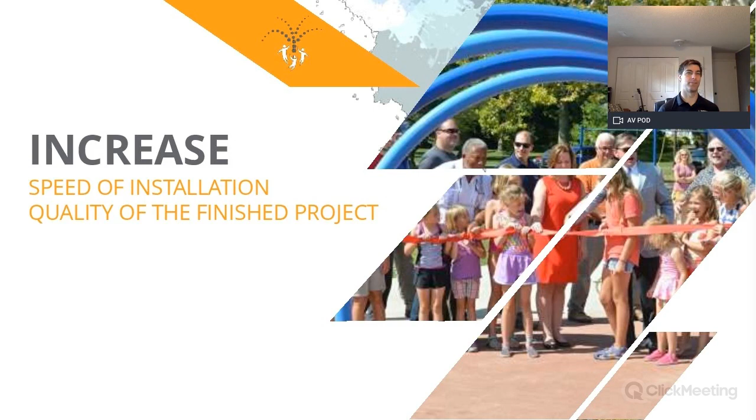So the very first thing that you're going to be doing is, after we talked a lot about planning in yesterday's webinar, when you actually go to install it, you definitely need to check your call before you dig. Depending where you are, you're going to have a different phone number, different states have different contacts. Please check with your local jurisdiction. The last thing you want to do is start your project off by hitting a gas line or who knows what. It could be anything. So that's very important. First step.

Next up, you're going to want to have some sort of a site survey, geotech report. You really want to be sure of what you're building on top of. If you build on, it could be marsh, it could be swamp, sand. It's going to cause you some problems as you go to pour footings. It's going to cause problems for the park over the years as you see shifting and settling. So the very first thing, start with a firm foundation, site survey, geotech.

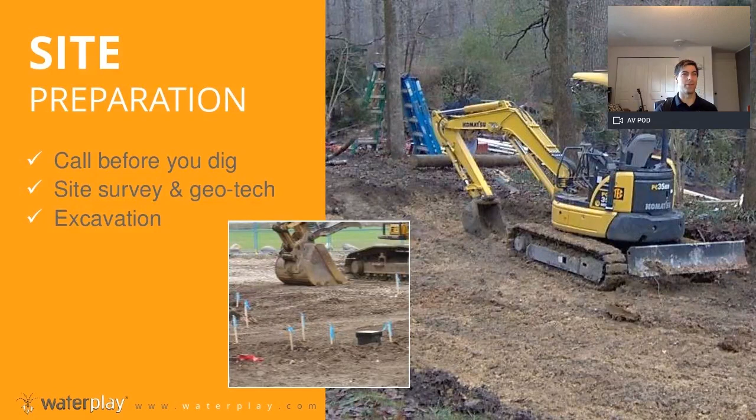And then you're ready to do some excavation. So level things out. You're going to want to clear the area. Here you can see that it looks like they're removing a forest for this project, so that's pretty intense. Hopefully yours is not to that level, but if you start with a flat area, it will go a long ways for you.

Most features, actually every feature, is going to require some type of footing just to stabilize the component. So typically this is your first step when you're on site: after you have an excavated clear area, you're going to prepare your footings. It could be as simple as digging down with an auger. You might have a site where you have precast footings. You might have square footings, round footings. Whatever size and shape of footings you have, this is going to be where you start.

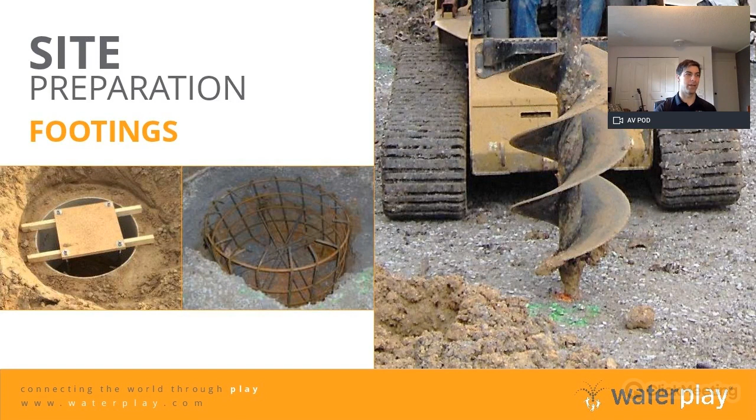Now your footings are going to be specified by your project engineer, and they need to review the weights of the components, they need to review the building codes, look at things like what you design for wind speed and items like that. So work with them closely to size the footings, but essentially this is where you're going to start. You can see here these guys are using an auger and simply coring out an area and filling it in with rebar reinforcement.

When product starts to arrive from your manufacturer, we try and make note of this because it's a pretty big step and quite often it gets overlooked. So you really want to inspect your shipment carefully. Know what you're supposed to be receiving. As a manufacturer, I can speak to this. We are at the mercy of truck drivers and courier companies, and typically they're really good. You get the odd shipment here or there. There's one or two a year where unfortunately there is some damage that's present.

It could just be maybe they cross-docked it, maybe there was an errant forklift driver, maybe something happened along the way, especially for those of you that are phoning in from Brazil and Spain. You know that you're quite a large distance from your manufacturers, and you really need to be careful, especially on an ocean container. It could have gone through a storm and things could have rocked pretty heavily in that container.

But the very first thing that you should do is request photos from your manufacturer and compare the photos with what you receive. Have them handy, have them on your phone. I mean, you could even print them out and just reference them compared to what you see when you unload the truck. And if something looks different, then start to dig. Start to go in there, see what moved, why it moved, what happened, and make sure there's no damage. If there is damage, note it on your bill of lading.

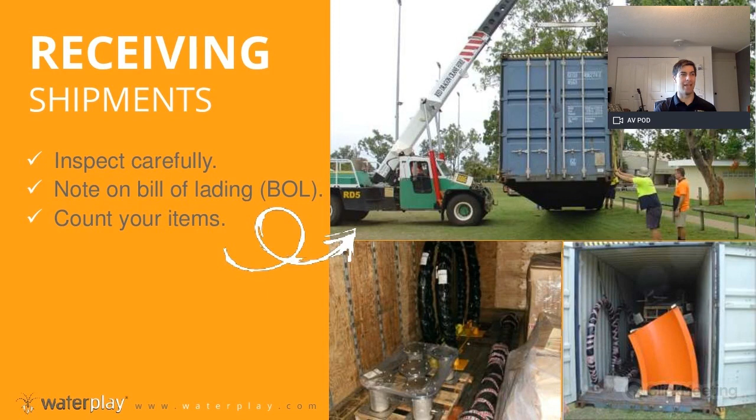Count your items, make sure everything is there, and if there's a problem, reach out to your manufacturer right away. They should be able to help you resolve it with the freight company. If you don't act quickly, there's very little recourse. It just gets messier. So act quickly, and it helps smooth out any potential problems.

Make sure that you're not getting moisture trapped in there too, and boiling it in a hot sun or anything like that. If you do end up getting a lot of moisture inside of the wrapping, at that point it's appropriate to unwrap it and let it dry out, but make sure that it's dry and secure, and leave protective wrapping on as much as possible, even just to keep it cleaner during the install.

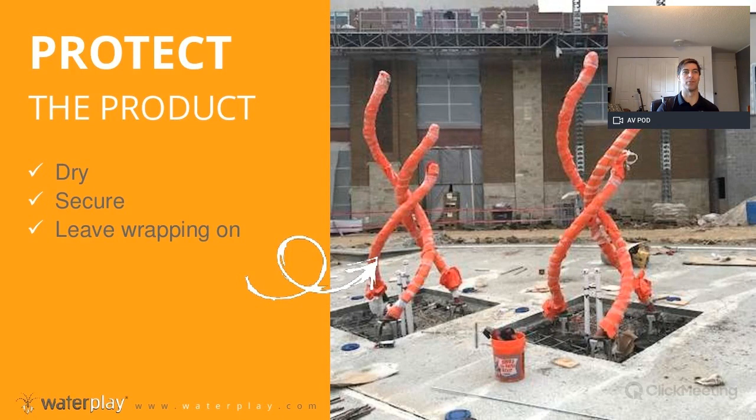Construction sites are dirty places, and when you hand this over to your customer, you really want it to be clean. You want it to pop. You want it to be looking amazing, and they'll be so thrilled with it. During the pre-shipment phase, this is where you're dealing with everything that is below concrete. So like I said before, the meat and potatoes, the fun part.

The other method that we see quite often, and this is perfectly acceptable, is something like a Hilti anchor, where you chemically anchor the bolts in place. And that's not a problem at all. It's pretty common, very strong. They use a very strong epoxy. As long as your project engineer is happy with that, no problem there at all. Typically, you'll have manufacturers send out anchor bolts to precast in place.

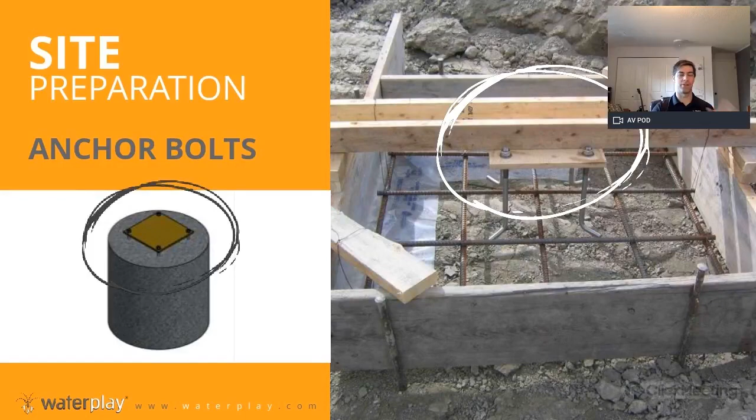Now, a lot of manufacturers use what we call an attach and exchange base. This is a really, really strong idea. It's pretty common in the industry now. Most people have it. It allows you to remove features and put on new features in the future. We talked yesterday about how you can use these for a phased installation. You can plan for the future. You can plan for maintenance. It's a really smart idea.

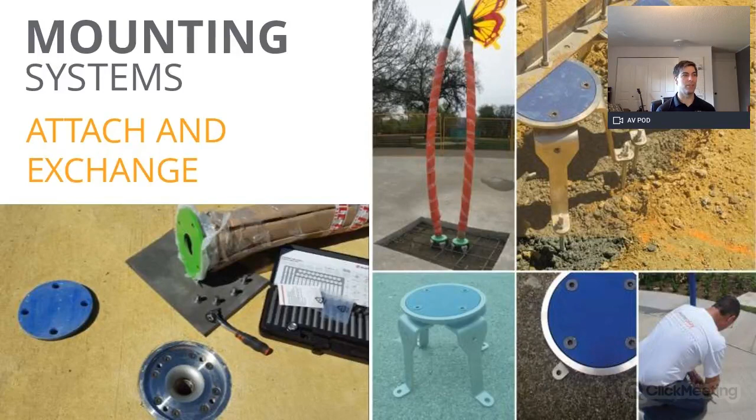Some of the other advantages we just listed out here, just so you can review this: you have a clean design. It could be flush, no toe guards or anything else like that. You can have a quick install. Most of the features typically would just bolt into place. Most of the work actually is done below ground, and if you're able to get that fairly quickly, you can speed up your whole installation timeline. You don't have to wait for painted product. You could do an early shipment of everything that goes in the ground and have it on site within 2 weeks or so, depending on the manufacturer, of course.

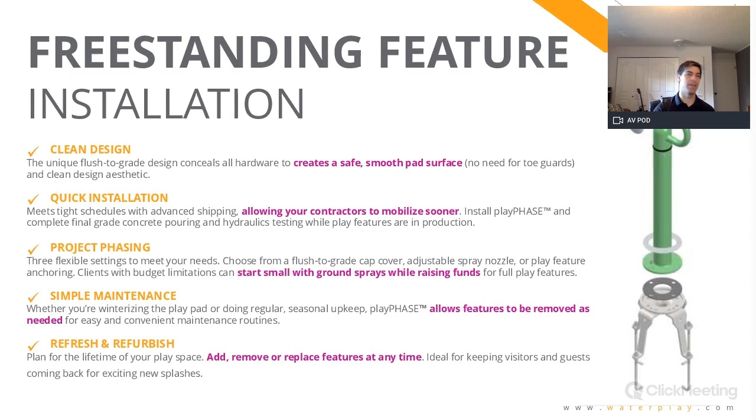Project phasing, like we said yesterday, maintenance, you can refurbish the park in the future. So attach and exchange bases, if you're not familiar with them, definitely encourage you to look into that. It's an excellent tool for parks across the board. So once you have your base in place, now I tried to put a few different variety of bases because there's different methods, different ways.

If there was an electrical charge, say a lightning strike, which hopefully nobody is in the park during a lightning storm, not a good place to be during a lightning storm, it has a safe place to go and discharge into the earth. So it's an important step. Lots of times it seems to get overlooked until the last minute, and oh no, we gotta ground it and bond it. So please consider this ahead of time.

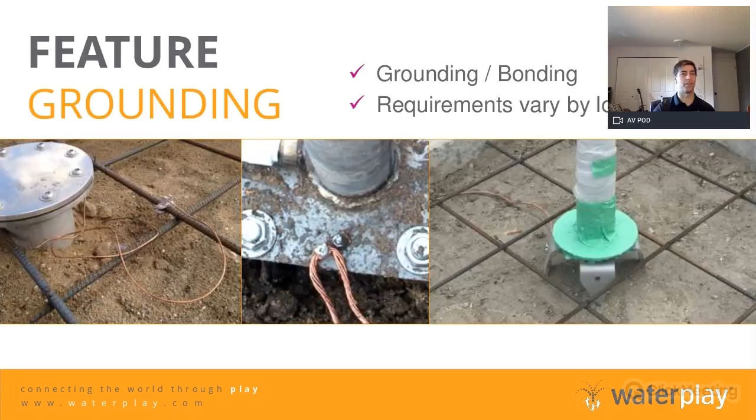Make sure that your electrical has this in there. If you have a subtrade for electrical, make sure they have this in their scope of work and they're able to do this. And typically, just a number 6 bare copper wire is sufficient for this. When you're piping, it's important to do a few things here.

Obviously, you want to connect up all your plumbing and do a pressure test. We recommend testing with water. Somewhere around 50 to 60 psi should be sufficient for your test. Hold it for a few hours. Some jurisdictions require a higher test. They like to see higher pressures than that, and they like to see you hold it overnight. Not a problem. More is better.

Absolutely, at the end of the day, you want to make sure that you have zero chance of a leak in your piping. And of course, be very careful after you do your pressure test, while you finish off your concrete pour and other things too. The last thing you want is to go to turn the water on for your park and discover that something underground is not holding water. So very important.

Some people also test with air. It's not recommended simply because when air fails on a pressure test, if a fitting blows or anything else like that, it tends to explode outwards. It can be a little bit dangerous. So especially if you get into higher pressures, like 100 psi with air, you want to be really careful. It's a pretty charged system, so stick with water.

You don't have to do massive pressures unless your plumbing code requires it. Our features only run around 20 psi, so check with your manufacturer what the pressure of their features is to make sure that your pressure test is at least double that, and you can hold it for a good amount of time to make sure that you have no issues.

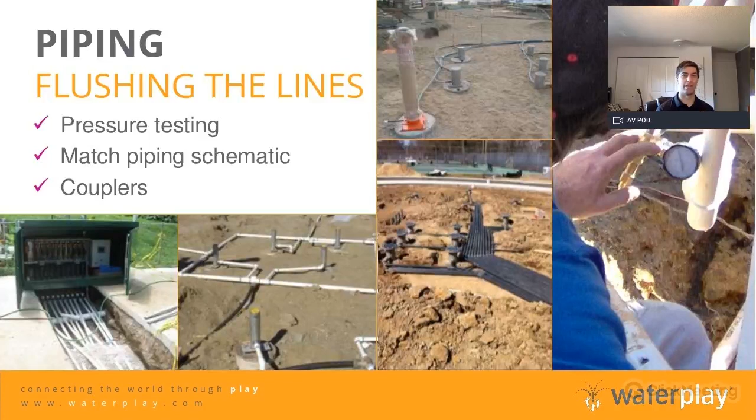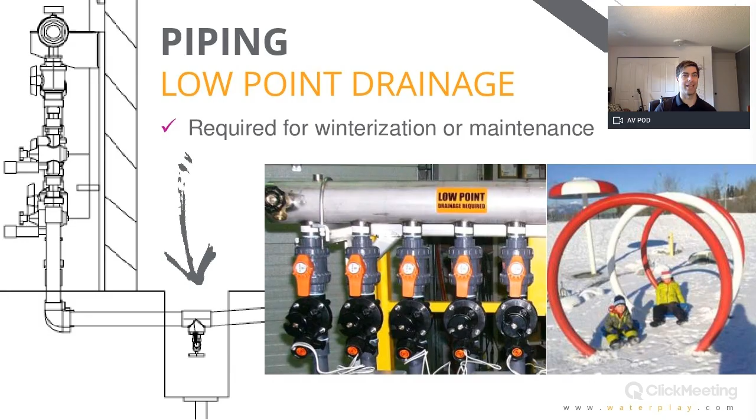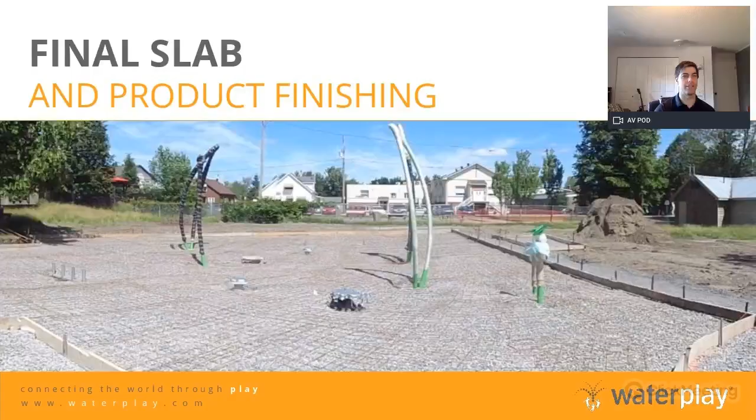When you're talking about your final slab, it could look like this. You might have rebar, you might have wire mesh, you might be doing a complicated rooftop install. I know we had some questions yesterday about that. So this might look a little different depending on your specific installation. But typically what we see is between 4 and 6 inches thick.

Especially for our partners in the States, you need to watch your ADA slopes. Maximum slope is 2%. So be careful that you're not exceeding that slope, but you still need positive slope to drainage. You don't want any spots that have any low point or any chance of pooling.

Be sure that your concrete workers, especially if you sub it out, know exactly where the ground sprays are, that they're taking great care around them. We have some installers handle it different ways. Everybody comes up with their own method, but I think my favorite personally is the flags on top, just to really mark where they are.

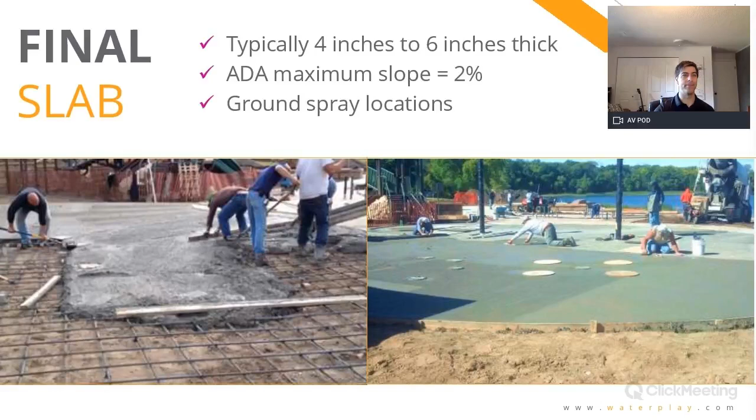I mentioned drainage. Make sure that you have good slope to drains. Again, health authorities will look for things like water pooling on the deck. Be very careful, make sure you have no low spots. And also when you're running water towards the drains, try not to run them over top of ground sprays. Try to keep your drainage paths, the lowest points, away from the features.

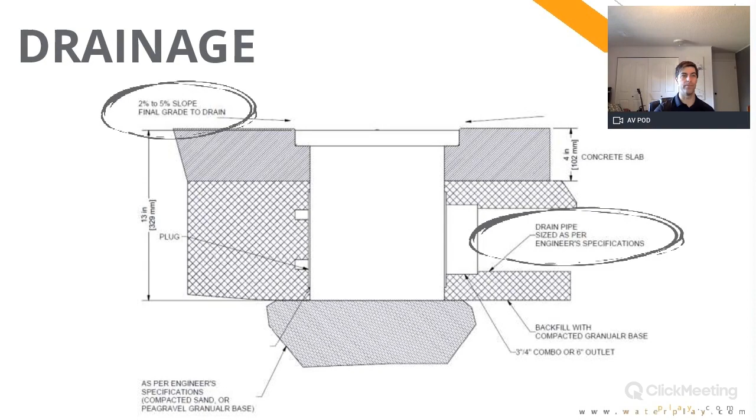In fact, it's a good idea to crown up slightly to your ground sprays and other components. If they have water draining over top from other components behind them, it affects the display of the components. It can change the look of the park drastically, and you really don't want to have that if you can avoid it at all.

The other thing we get asked about quite often is finishing on the concrete. Do I put a sealant on this? Do I polish it up? Please don't do that, because if you do, it could get really, really slippery. I know even with painting it, you have to be very careful that you're not introducing a slippery surface. Same goes for safety surfacing. Be very careful. It can actually be more slippery, and kids can actually surf along safety surfacing and things like that.

So our recommendation, and this has been industry standard throughout the whole time that we've been doing spray parks, close to 30 years here, is a light broom finish concrete. Just a light broom finish gives it enough texture that children can run. They have grip. They're safe. Nothing's going to be slippery for them or dangerous in any way.

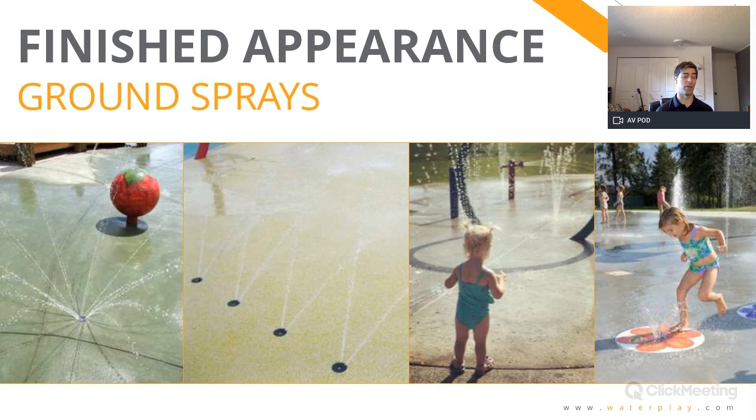We've seen parks where they put a sealant on, and while it might be good for durability and it might have other benefits, unfortunately, it does get slippery when it's wet. So you have to be very careful about that.

So when we're talking about other final steps, what you're going to be doing is taking out your plugs that were there for the nozzles. You had those in for pressure tests, and putting in performance nozzles. When you do that, please remove your blanks and flush the lines. Run them for a few minutes, get all of your construction debris out.

Don't let sand and grit settle in there, because if you do, and you put your performance nozzles in, you'll be cleaning out your nozzles for the first few weeks of the park operation. So take them out, flush the lines for a couple of minutes. That's also a good chance to check out your drainage, make sure everything looks okay there, there's no concerns. You'll be happy that you did that, and it'll really help, especially for opening day.

Opening day, you want the park to look fantastic and great, and you want the customer to be overjoyed. If you are the park owner, you want to be overjoyed. Flush them out, get it all tuned up, give yourself lots of time. You don't want to come down to the last minute to be doing this. An hour before grand opening is not a good time to be flushing out your nozzles if you can help it.

Feature cleanup, so give them a good coat of wax. You can polish them up, clean them up, make sure that the construction debris is off them. If you were smart and you kept your wrapping on most of the time, take the wrapping off and make sure that everything looks polished and bright and brand new.

The other thing to do is, if you're an installer and you're working with a park owner, this is the time when you start to talk through the maintenance schedule. You want to talk through different checklists. Manufacturers should have checklists that they can provide to you, along with an operations manual.

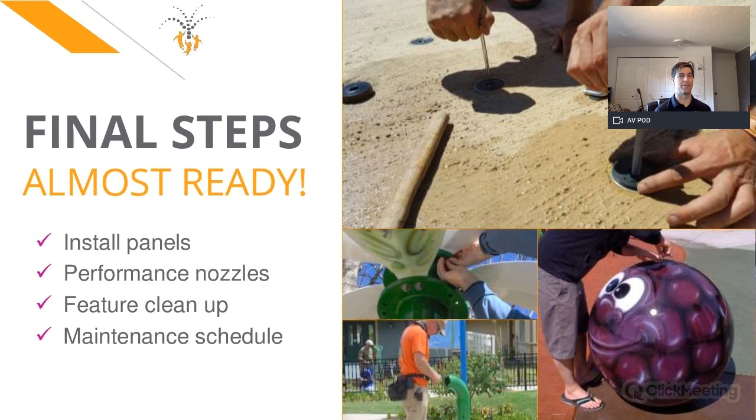So work with the manufacturer, take all of your checklists and make sure that the owner has those, that they know what they need to do, and you can do a walkthrough with them, show them exactly how everything works. Make sure that the person that's actually going to be operating the park is there as well. So you really want to make sure that they understand what they're buying, that they're excited, and that they have all of the documentation and material that they're going to need for the future at that park.

And then finally, don't forget your blue ribbon. Celebrate. It's not the easiest installation in the world, but it's certainly fantastic. And look at the end result here. It's a really cool way to celebrate community. And especially during these times, we miss this. This is something that's crucial and very important to our world. So I think especially after COVID, we're going to be celebrating that much harder at the grand opening of every other park. So, take pride in it, take photos, send us photos.

We love getting photos. We don't always get the privilege to get out in the field and see where our product ends up. We see it leave our factory and that's it. So send photos to your manufacturer. They'll love you forever. But definitely show up for opening day. As an installer, you can be there to troubleshoot if something goes wrong, or just to celebrate. And it's a great time. So be sure to plan that into your schedules at the beginning.

And that's an installed park. So I'm going to open it up for questions here. So we're just going to swap over here.

This is an excellent question from Dean. Placing and finishing concrete around intricate decorative ground sprays such as ants, frogs, and snakes can be difficult. Any tips? Yeah, Dean, that's a great point there. It can be tough to get in there. You really need to take your time, and I've seen people use a skinnier tool to get in along some of the tighter spots. It's difficult, but if you take your time, it can be done.

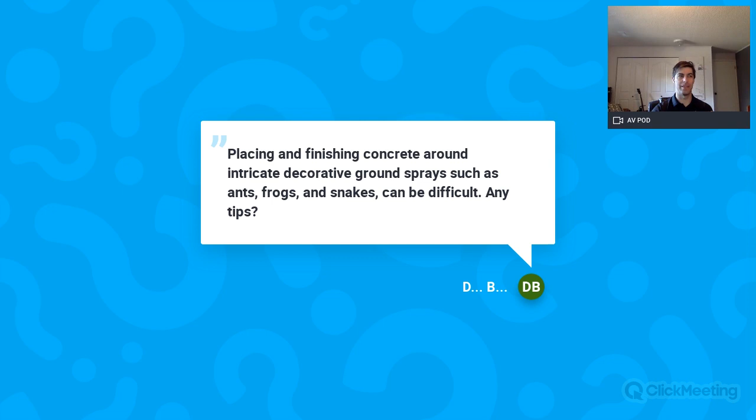For our product line, our design has actually been tweaked to make it easier. There's less tight spots and things like that, to make it easier for installers. So that's something that's also good to consider ahead of time when you're looking through the installation documents and different specs and submittals: making sure that you understand those little tweaks and tough spots.

We have a question here. What is ideal finish for the ground spray? Now, Manish, I'm not sure if I fully understand the question here, but if you wouldn't mind clarifying, are you talking about the actual nozzle itself, or are you talking about the area around? If you put a clarification in the chat there, then I'll come back to that one.

What would be the maximum height above finished grade to crown a ground spray? Great question, Mitch. So I've seen typically even just 1/8 of an inch is just enough so that if you have water draining, it is encouraged to go around the feature, not over top of the feature. So even just 1/8 of an inch, and even your concrete guy can almost form it up a little bit as he's doing his finishing.

And you don't want to do a lot, because obviously then it's a tripping hazard. You don't want to have any edges either, so you really want to smooth up to it when you're doing your concrete. You don't want any exposed edge, because then it becomes a trip hazard, and it's not such a great idea.

We have a question here from Marianne. What about using poured rubber on the concrete? So we see this, and it is something that's being discussed a lot in the industry. In our experience, it still can be quite slippery. The other thing is it doesn't seem to last all the time. Check your warranties very carefully, see how long they guarantee the product for, and make sure that it's not going to become a maintenance headache for your customer.